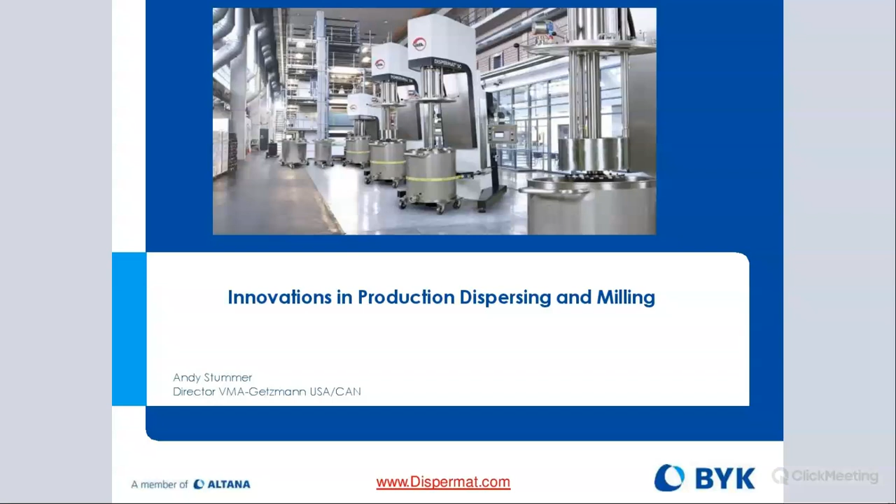Today we're going to talk about the innovations of production technology. We're going to talk a bit about the different dispersers and also basket mill systems that are available for larger scale production. With that, we'll go right into the next slide.

We'll have them on display, and also the latest and greatest laboratory models that we offer: the new CV3 Evo that just came out, the new CN and AE lab scale dispersers, and the basket mills. We're going to have those on display.

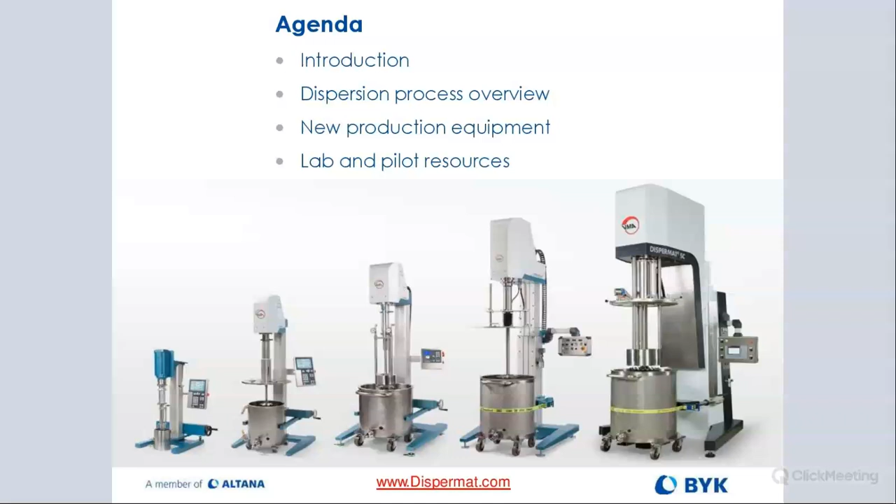So basically the company has been growing quite a bit over the last almost 50 years, and they now have over 100 employees worldwide. They're still run by the same family, Martin and Christian Getzmann, the sons of Hermann and Elke, are the CEOs of the business. VMA is known as a high-end quality manufacturer of dissolvers, bead mills, basket mills, not only for your laboratory needs but also for upscaling to pilot as well as manufacturing facilities.

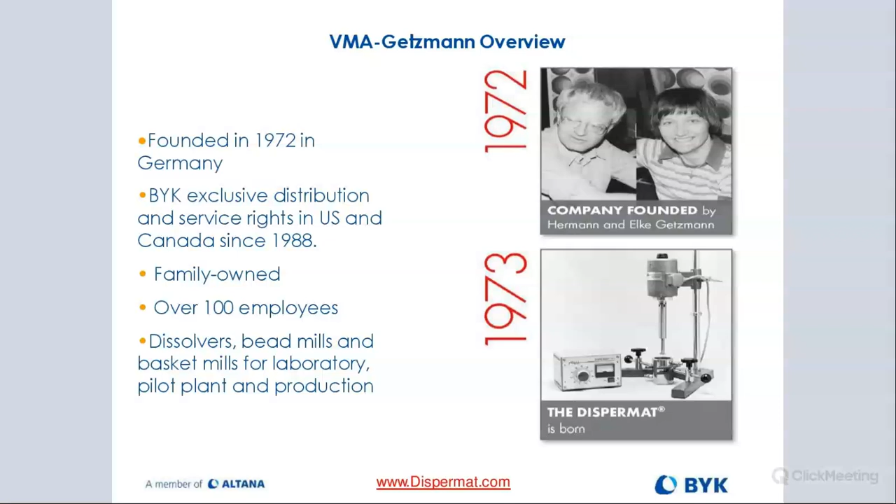About 40% of everything that VMA builds today is custom. So there's a lot of new end use markets with different types of requirements, like fuel cell and battery, which have very special needs. So VMA is on top of those requirements and needed more capabilities from a manufacturing and design standpoint, so they had to add that space to support these new growing markets.

And they also have a really good lab space in Germany and the pilot facility. So if you have colleagues over there that want to come in and visit VMA and run some trials, let us know and we can set that up. We have a number of people that come in every year, US colleagues that have businesses over in Europe, that would then take advantage of that lab capability.

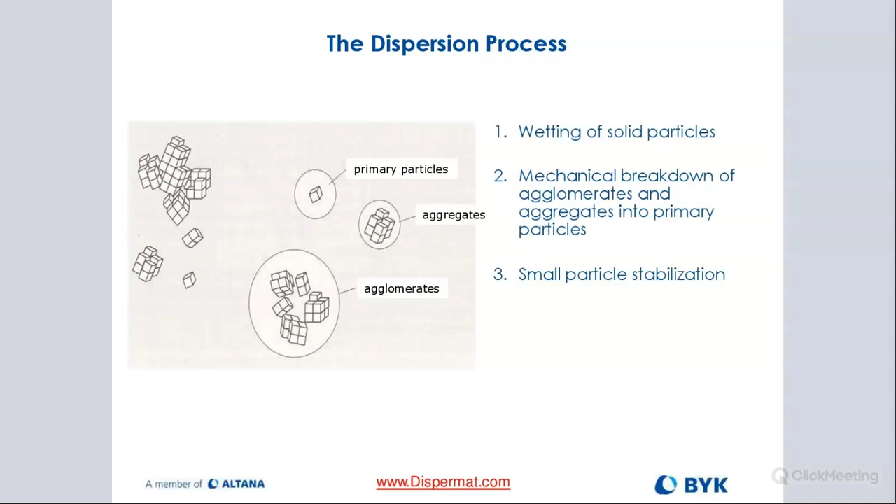Obviously, once you separate the particles, it's really important that we keep those particles in a suspended state, and that requires some type of additive to help us accomplish that. Our sister company, BYK Additives, has a good selection of various additives for all the different markets like inks and coatings, just to name a few. And now with batteries, Erin Kelly, if you know her, they can offer really good solutions to ensure that these particles stay in a suspended state.

In the case of a horizontal mill or a nano basket mill, particles as low as 100 nanometers and less with the right setup. And again, stabilization of the particles is critical to ensure that they don't flock back together and form new clusters.

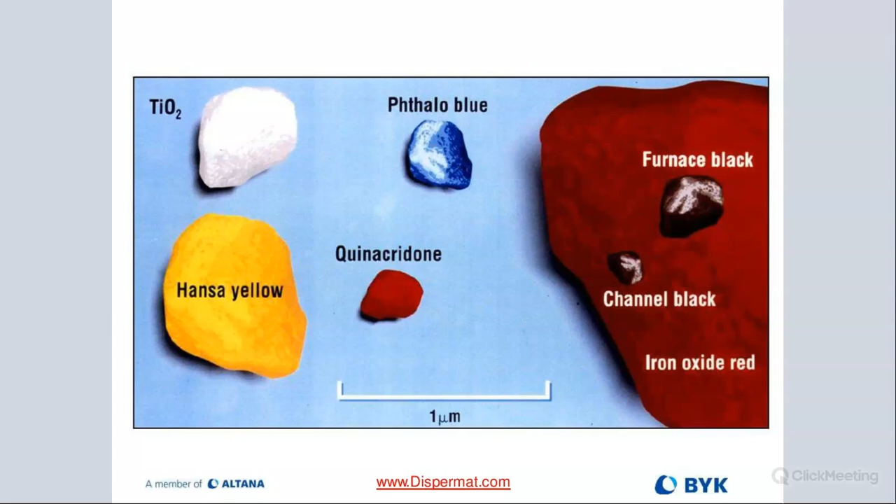And anything smaller requires some sort of bead milling. Obviously, there are different types of mills we're going to talk about today. Very well known are the horizontal mills, or some people still use 3-roll mills, sometimes used for reducing particle size.

Our business is very strong with the basket mill approach, or what some people refer to as immersion mills, for numerous advantages we're going to cover. And then there are also some vertical bead mills, like pot mills, as they're referred to. They are more used for laboratory and small pilot because it's very difficult to scale them due to the volume of beads you would need in a manufacturing environment. But you can see that if you have the right bead mill, you can get down very, very small in particle size.

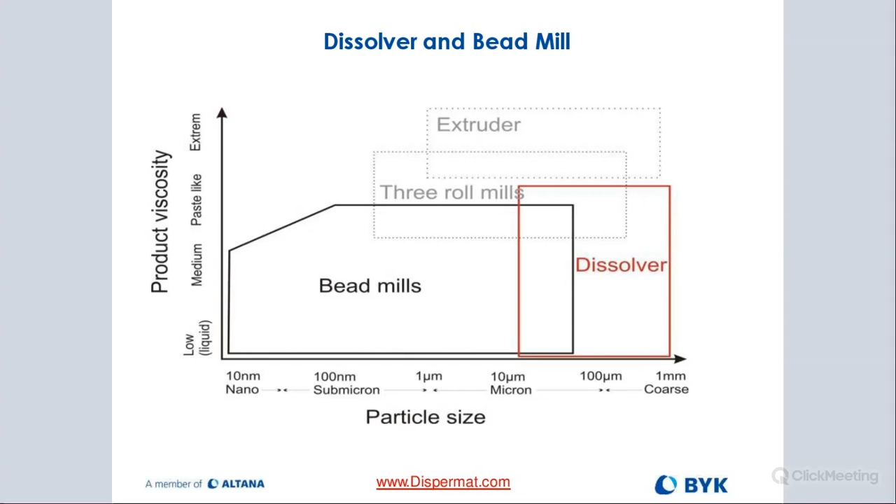And we had some cases in automotive and battery applications where we are below 50 nanometers now. So it's pretty impressive. You need a lot of time and very, very small beads to get there, but it's definitely possible.

So in a nutshell, the dispersion process is always 2 parts. We first pre-disperse by using a dissolver, and there we have for production the Dispermat SC we're going to cover. Then once we pre-disperse and get to about 10 to 30 microns of particle size, we do our fine grinding or milling or fine dispersing processes, where we have the different milling options.

So we have our vertical bead mills, milling system called APS. We're going to talk about and show you a picture. That's more for lab and small pilot.

Then we have the basket mill approach, which is really nicely scalable all the way from lab to pilot to manufacturing. Torusmill SK, the quick change system that we have, where you're able to go very quickly from a dissolver setup over to a basket mill setup, giving you the advantage of having one piece of equipment for both your pre-dispersing as well as your milling.

And then horizontal bead mills are well known, and there we have the series RS, different chamber volumes depending on how much you want to make per hour. But these are the 3 different milling technologies that VMA offers, and that's what we're going to be talking about today.

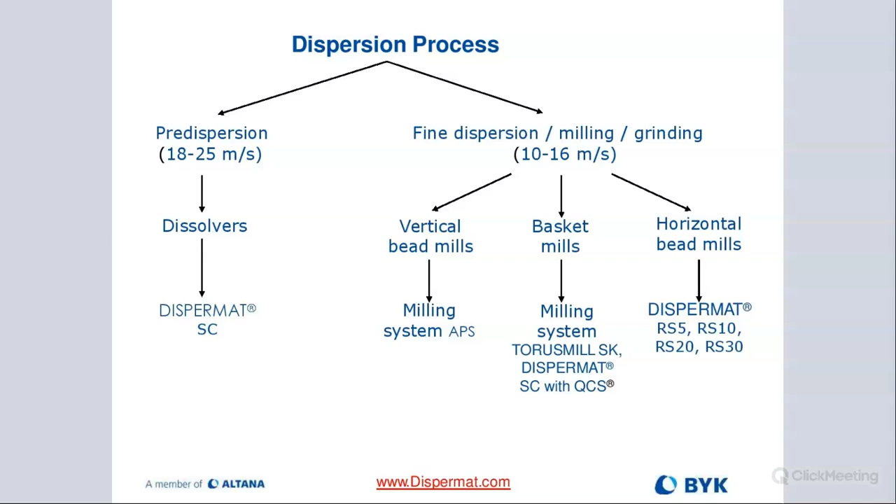We hear a lot from people that are in the battery world. We're actually going to be at the battery conference in Orlando in 3 weeks, and then we have one coming back up, I think in September or October, up in Detroit, the large battery show up there, and we have our units on display. But many other end-use markets, cosmetics is another big one where they use that type of technology to reduce particle size.

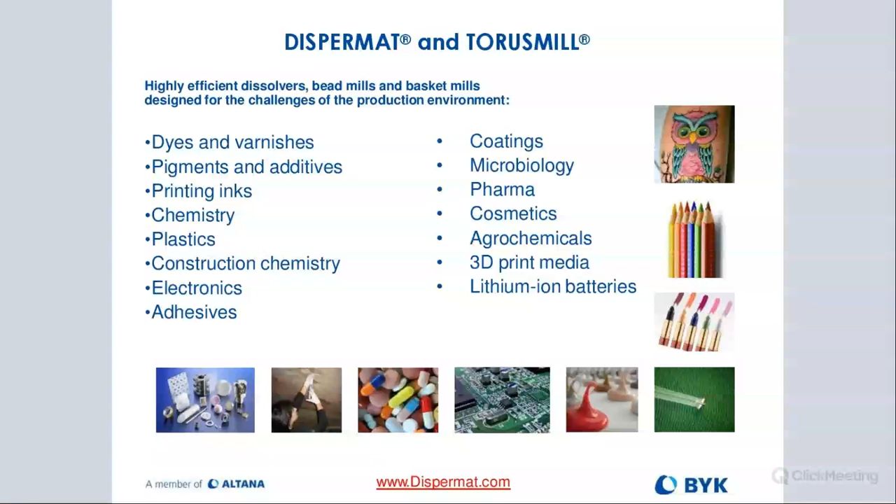So the Dispermat SC is our dissolver for production. We have output anywhere from 15 to about 55 kilowatts, and we can go up to 2,000 liters of slurry, so that would require a 2,500 liter container.

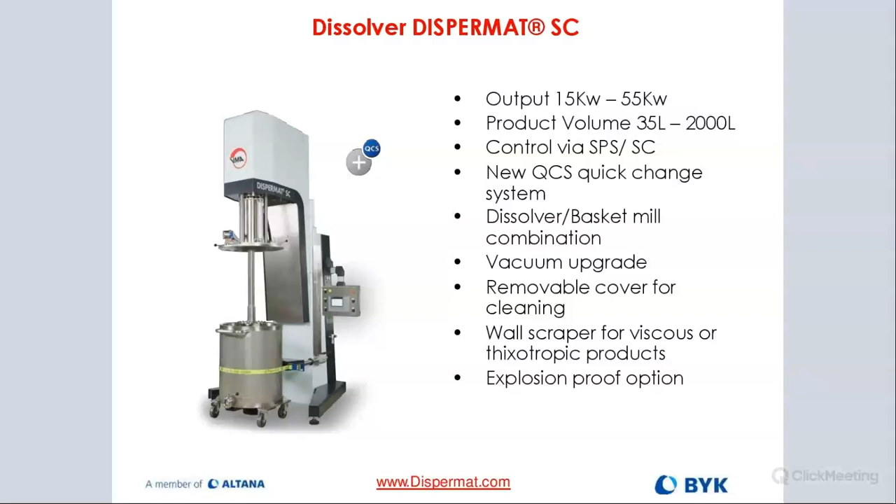And then we have the explosion-proof models and the Dispermat SC as well. So this is something that we offer depending on the environment they go in. And then we offer also the vacuum, as I said, so that allows you to pull the air out and flush with nitrogen or argon or any inert gas if you want to have that type of environment, or create a blanket of these type of environments.

So you would have only one piece of equipment really instead of multiple pieces, because what customers have been doing - let's say you have a coatings operation with many different color families, and orders come in - instead of tying up a machine all day or half a day for cleaning, what you can do very simple is remove the basket, do a quick flush, and then replace it with the basket of the next color family that you're running. So that would then allow you to always utilize the equipment and not be tied up for cleaning. That's really, really helpful.

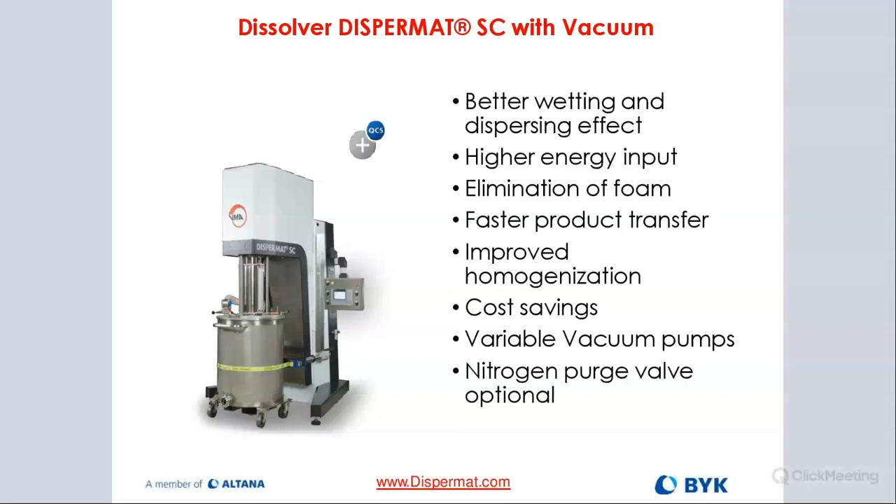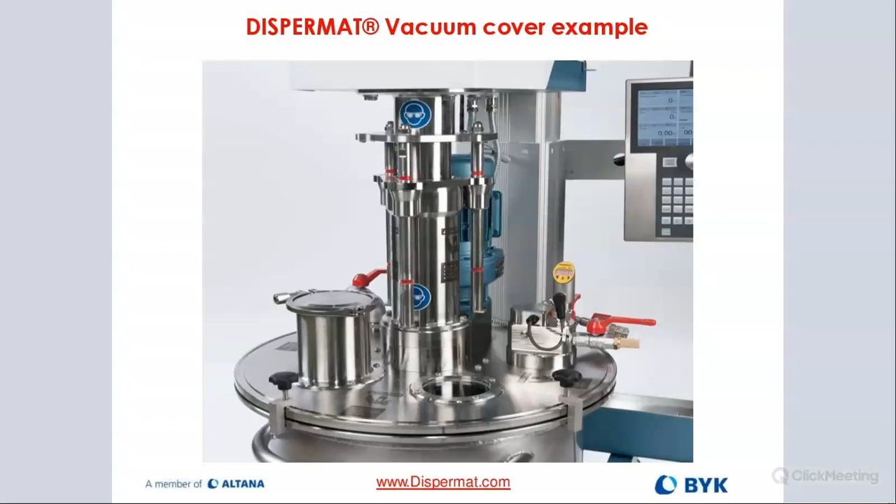That's a close-up of the cover. It's a really well-designed piece of engineering. Here you have a very tight lip seal, and a viewing glass. There's actually an LED light you can turn on to show you what's going on inside the container while you're dispersing. We also have extra feeding ports if you want to add more material, and valves to relieve pressure or add any type of inert gas. So that's what that looks like.

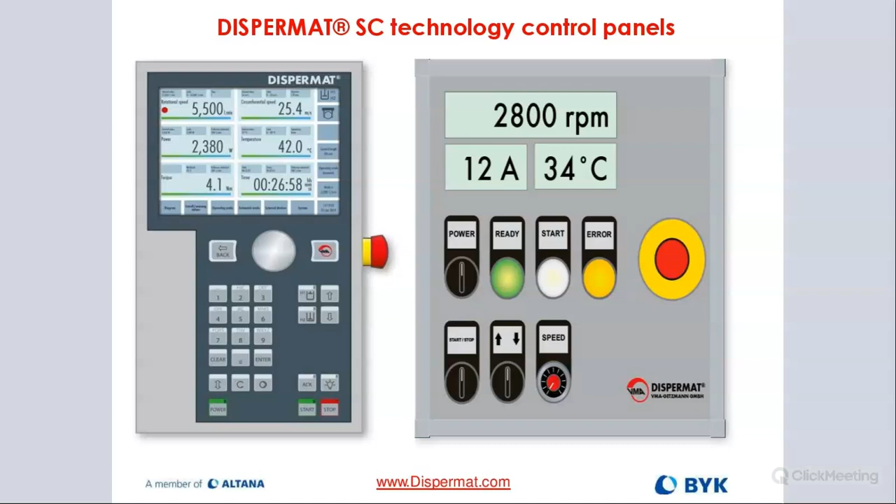Just an example here: you would only be able to lower the container cover if you have both hands on the panel. You see those two knobs on the bottom right - basically start, stop, and up and down. In order to lower the cover, you would have to turn both of them clockwise. If you only have one hand on there, it will not do anything - you need both hands on the panel. Otherwise you won't be able to lower the container. That way it's guaranteed you won't squeeze your hand in between the container lip and the cover. So just some things like that that are really important to ensure safety for the operator.

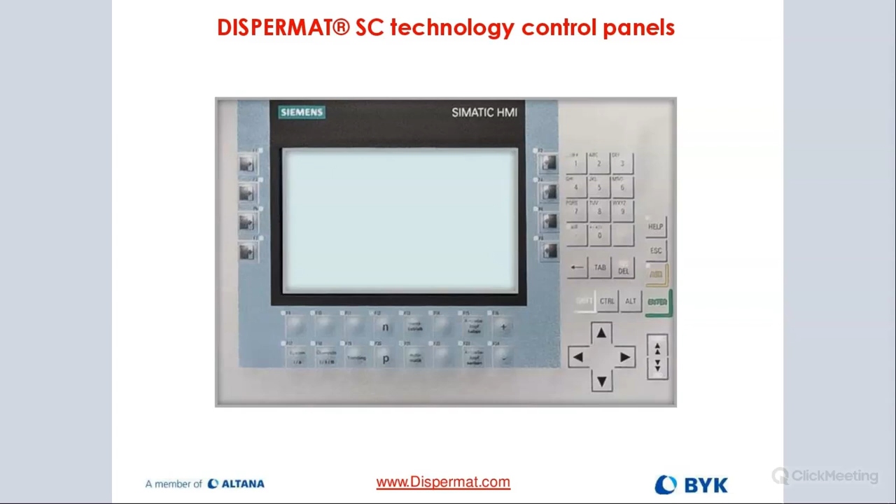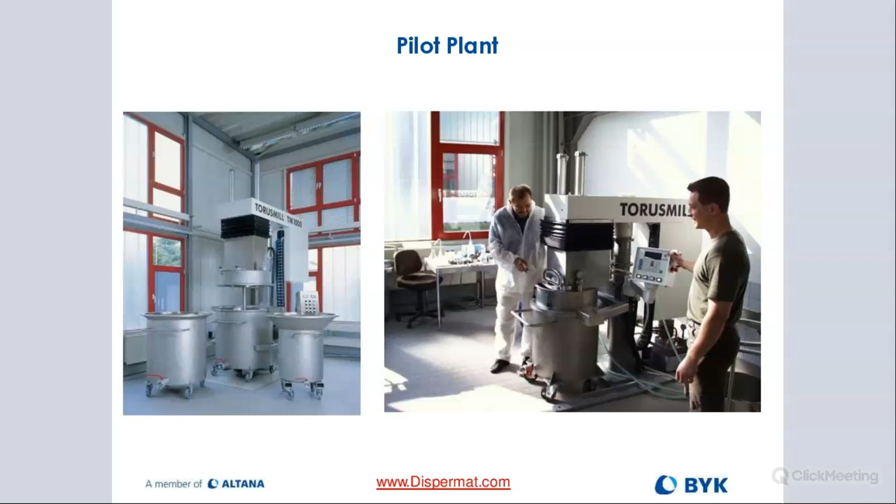We also have something really unique and very cool for customers doing products where they never worry about color change - where we're doing the same thing all the time, pre-dispersing and then milling. This machine is called the Dispermat TM. It's basically a 2-in-1 - you don't have to add a basket mill to it, it's already there. So you have a dissolver and basket mill combo.

By the push of a button, the basket will come down and you're able to do milling. In picture 1 on the top left, you can see we're putting our mill base under the machine. Then we push a button and the dissolver blade comes in. We're adding more raw materials, deagglomerating, wetting everything, properly mixing our slurry. On the bottom, you can see the color has already changed, so everything is now properly mixed and pre-dispersed.

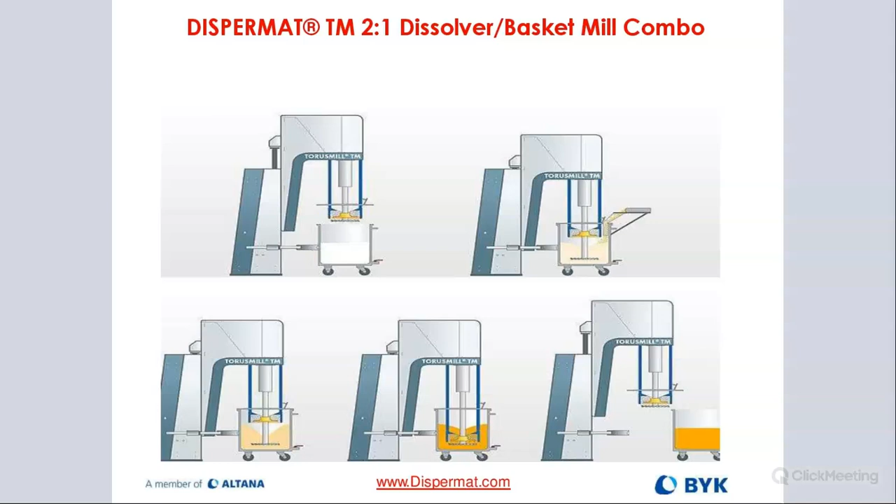At that point, we push a button on the panel and the basket comes down, and now we're actually milling. That allows us to really go down in particle size into the nano range if we have to. Then we're done - we just remove the container. That's all done on one machine, in one location, in one operation. Very, very cool, very easy to use, and we have a number of customers who really enjoy using that machine. Again, we can go up to 55 kilowatts.

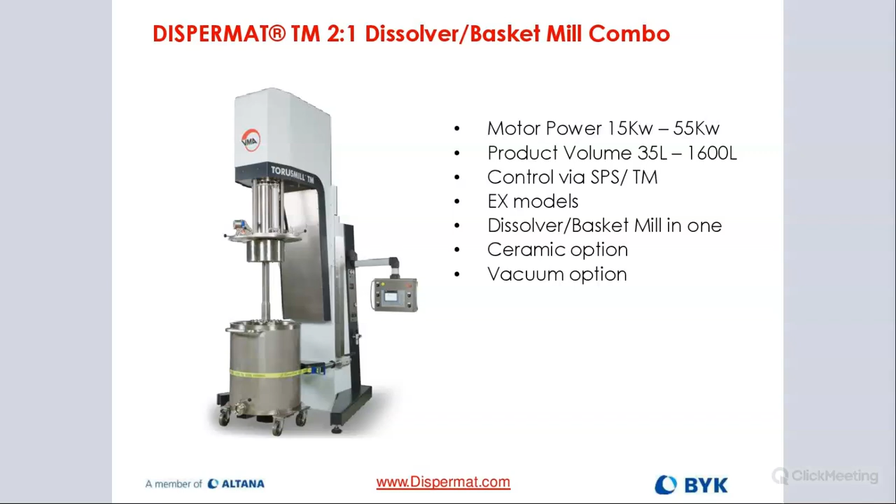We have 1,600 liters of volume, a little bit less than on the regular dissolver, because the mill head, the basket mill, has a lot of weight, and also takes up more space, and that's why we had to go from 2,000 liters to 1,600 liters. But again, different control options and explosion-proof models are available. We offer vacuum as well, and for batteries or certain types of coatings, we offer ceramic components to ensure there is no bleeding in from the steel or metal milling components into your slurry. So that's also optional.

Here's another picture showing how it works with the TM. First we pre-disperse the material, and then once we reach the right particle size, we start the milling process. The beauty is that I can use our TML in the lab and then scale it up to the TM in manufacturing very easily. All of our equipment has one huge advantage: it's very scalable. It's really nice developing something in the lab on a smaller scale, like a TML1 or TML5, and then upscaling it to the large production machines.

Also, it's relatively easy to clean. Once you're done, you just remove the container. Containers can be shipped with wheels, forklift channels, or both. Some people prefer forklifts, especially with the very large containers, so that's also an option. Then you would replace that container with another one containing cleaning solution or water, at about a 50% fill rate, and submerge the mill and run it for a few minutes. Then you rinse and repeat, and that does a really good job cleaning it.

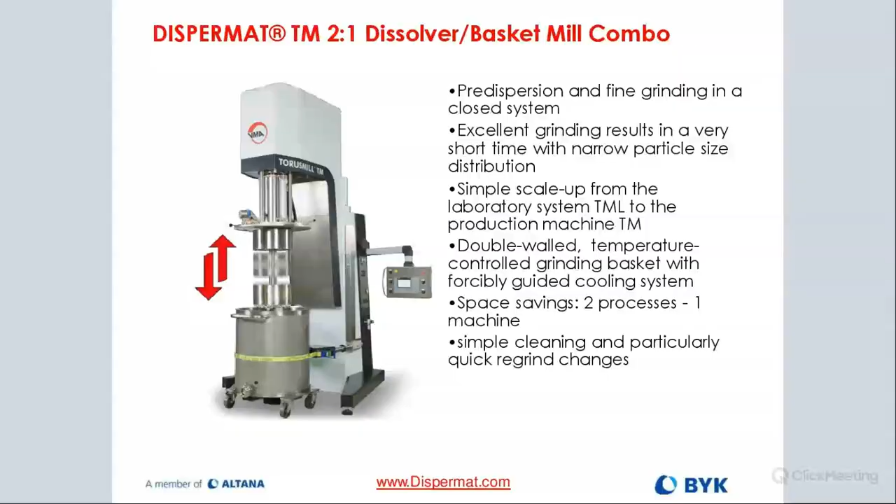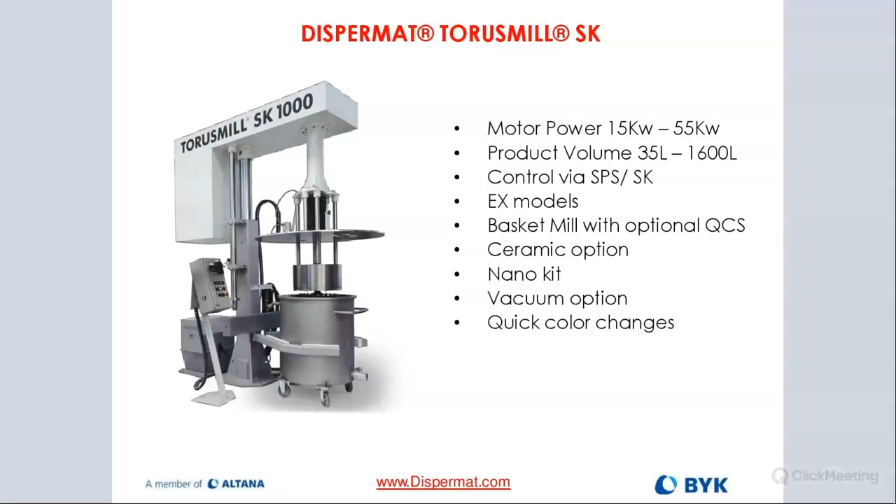So that is definitely something that you want to look at, and we offer those options. That's kind of the way that we go about changing over from a basket mill to a dissolver head, by using these trolleys, these transport trolleys.

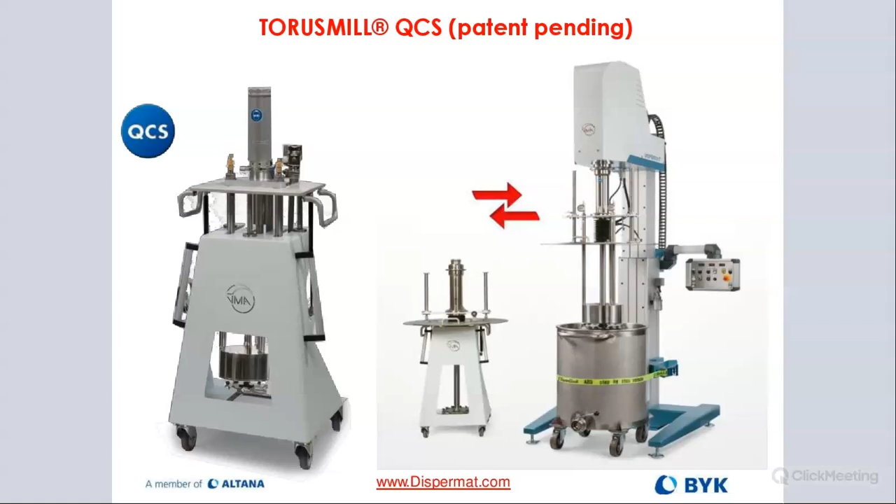They're very easy to move around. They've got handles on them, and you just put the trolley underneath the machine. The container would be removed from there, then you drop down either the dissolver or the basket, and line it up. One person can do it, no problem, and you can do that changeover in less than 5 minutes. Very, very easy. There's only one cable that you really need to unplug, the power cable, and that's it. Nothing else you need to worry about.

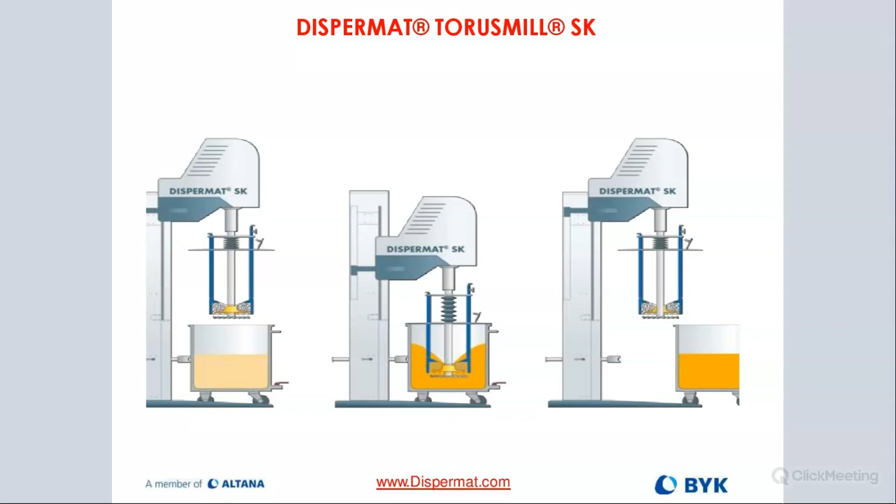So that's kind of just a quick photo on the SK, self-explanatory. Put your container, the pre-dispersed material in this case, under the basket, lower the basket, do your milling, and then you're done. This is a graph of our basket mill design.

Some of you may have heard of or been using immersion mills from other manufacturers, and they have screens on the side wall of the basket. Maybe you have a slide here where you can see that better. Yes, sorry, I'll go back. Here you can see that wall right there, the side wall on our basket is closed. Our screen is actually on the bottom. If you look at that graph, you'll see the screen is on the bottom.

The reason is that when we are milling, the milling disc will throw these beads around the milling chamber with very high force. If we have a screen on the side, those beads will impact the screen nonstop, leading to very high screen wear, meaning you'll have to replace your screen all the time. By having the screen on the bottom, we've seen that screen wear is reduced to a minimum. So that's one huge advantage.

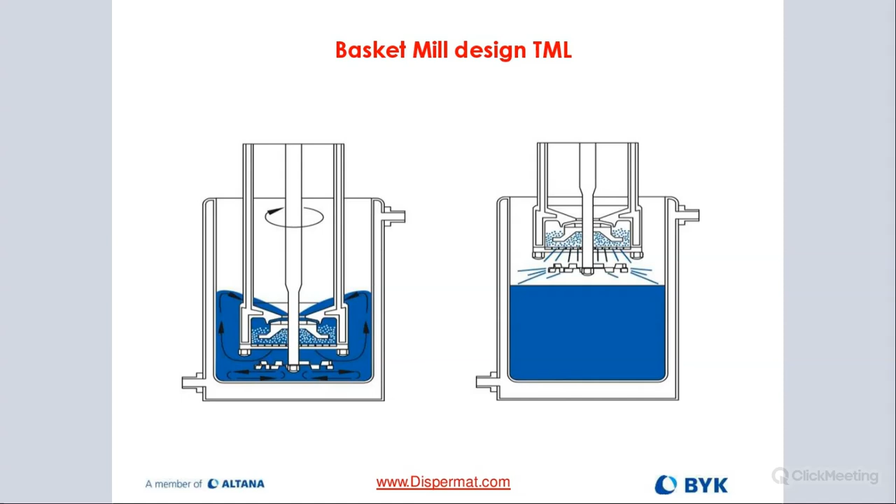A much bigger advantage we find is cooling. All of our basket mills, except the very small TML05 for the lab, have cooling capabilities. With the basket mill, we have bars that hold the basket on the left and right, and one in the back, so there are 3 bars. The bars in the front actually have cooling lines going through them.

The baskets are actually double walled, meaning the cooling fluid runs through the entire basket, even the top portion, ensuring optimum cooling of the mill base in the basket, where we're putting in all the energy. So that's where I need to cool.

We're able to actually measure the temperature with the PT100 probe installed in that bar behind there, which you can hardly see - it's behind the bar on the right. There's another bar in the back, the third bar holding the basket in place, and that's where we actually have a PT100 probe that measures the temperature inside the basket.

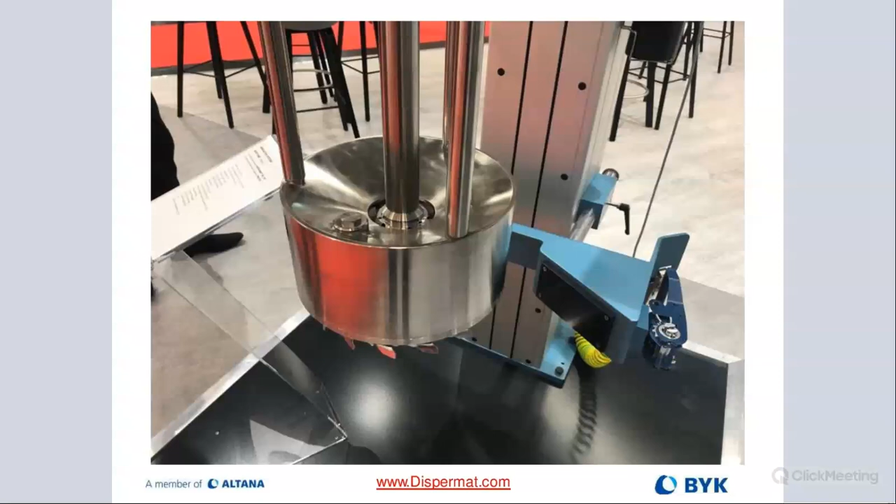So it's very important - optimum cooling is critical, and our design is different for optimum cooling and reduced screen wear. It's very important to understand that when you're looking at mill designs.

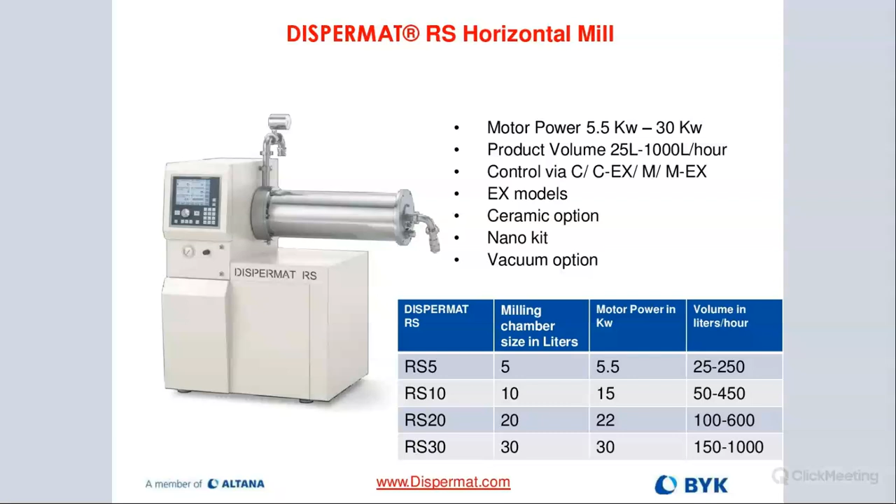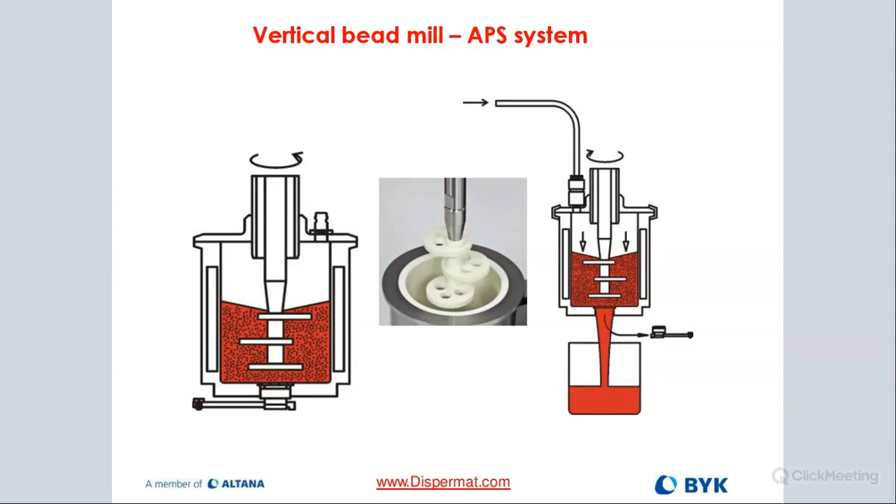I can put 100% bead ratio to my slurry ratio in here. So if I have 100 milliliters of slurry, I can add 100 milliliters of beads, which is really awesome because I can do a lot of milling, very quick milling, with that many beads. In the laboratory, it's easy to handle, no problem. But as we go up in size, it becomes a lot more expensive and tricky for the bead handling issue.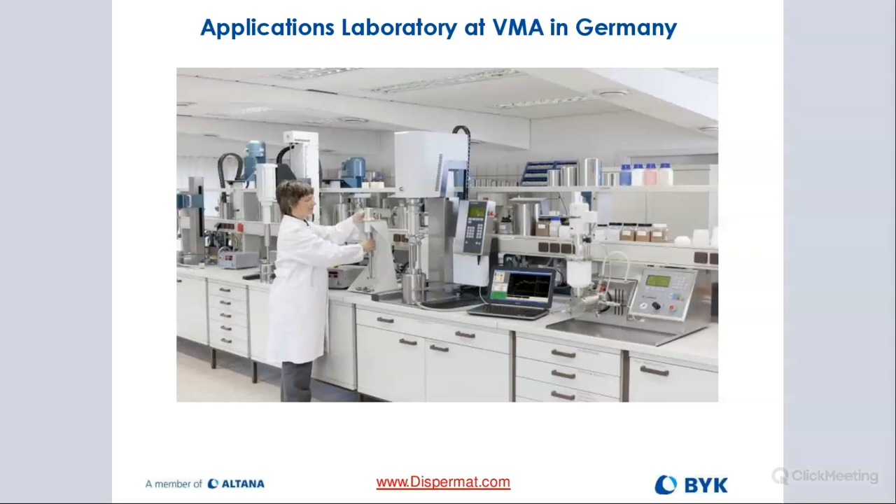And then we have another super well equipped area - we're going to update this picture. Come March, we're going to have a lot more equipment in there. We're going to get a vacuum system, a VL unit. We have the horizontal mill back that's out on loan. We have a new CB3 Evo, which is the brand new awesome laboratory scale dissolver for best upscale performance on the market. It allows you to do milling, use it as a vertical bead mill with APS, and you can put a rotor stator on there.

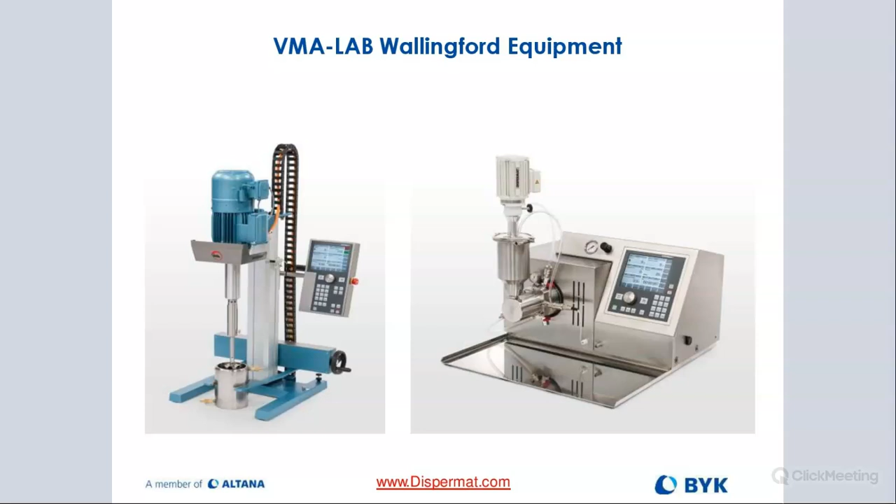It's a really cool small machine. Go on our website, check it out, it's available now. There are two versions - one will have a scale with it, the advanced version. And then we have the AE up there with the C control panel for scaling, so we can play around with that and show you that technology. And then obviously horizontal mill as well. So we would love to have you up there and tie you in with our colleagues at BYK Additives who will be supporting any type of project in the lab.

That's one big advantage of working with a company like ours when you go and buy a Dispermat solution for your manufacturing environment or lab space. We have really good resources with our additives group. We have customers that come into the lab with a problem - hey, we need a new dispersion, or we have issues with that. We can work on that with you and make recommendations, saying this solution or additive package works really well with our dissolver or milling technology. We've proven it out, we can show you in the lab, and then help you upscale that to manufacturing.

I don't know of any other company out there that offers that much synergy between an additive supplier and their equipment. We're really the only one that optimizes the equipment to the additives and vice versa, so we can be a really good resource for both angles. If you just want to come up there and look at the equipment without running trials, that's fine too. Or just come and call us - we'll bring you or your team in, and we can do even a seminar up there for you to learn more about the process. That's definitely something we would like to have. So thank you very much.

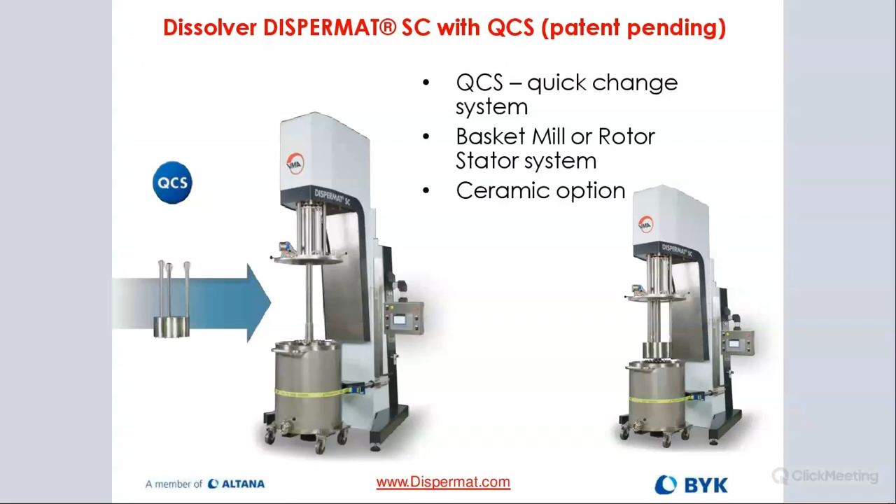The type of milling we're talking about here is not really impact milling, but more like breaking up binding forces, like particles that are stuck together—invisible forces. A lot of people think we are actually crushing pigments or particles, but that's not really what's going on. It's really just separating these binding forces. Yes, there is some destructive milling going on for sure, but that is not really the goal or point of this type of equipment.

So it really depends on what it looks like and what particle size you're looking for. Frank, if you want us to take a look at what you're actually doing, feel free to reply to an email or marketing message, and we can go from there and learn more about your process.

And all this is wet grinding, right? And wet milling, so we don't do anything dry. Everything, all of our equipment is for wet milling, wet dispersing.